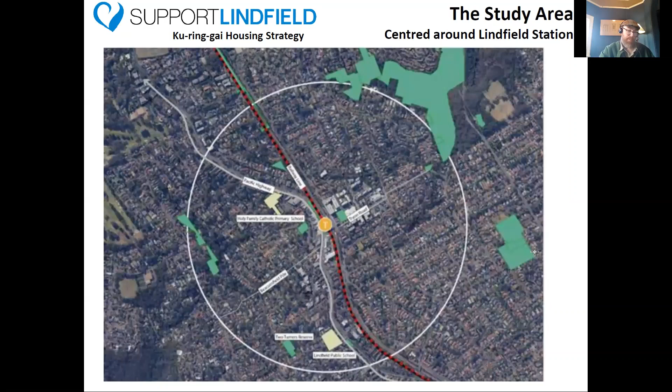Ku-ring-gai Council has created 3 options for Lindfield. The study area is an 800 metre radius from Lindfield Station, about a 10-minute walk. The logic being, people want to live near public transport, retail and community and amenity.

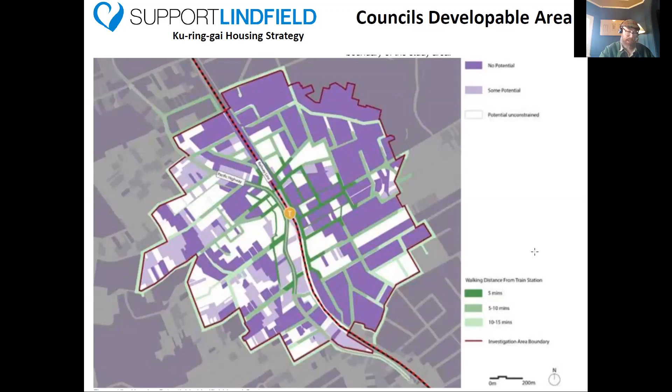The next part of the study has identified a radius that will determine what is the developable area. Within this, heritage, conservation, new strata apartments, bushfire, riparian areas, environment, critical vegetation have been excluded from this developable area. It's largely the areas that are left in white. These are the unconstrained or unrestrained detached houses, shops and older apartments that could be used for development to achieve the increased dwelling needs.

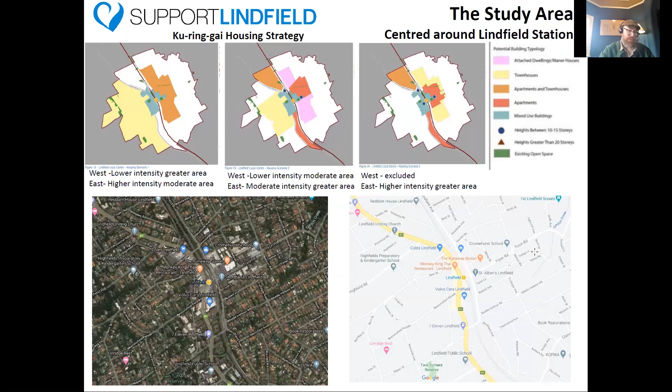The next part of the study considers what type and number of dwellings are required - townhouses, apartments and houses - and where these should be located. There are 3 scenarios under consideration that I will step you through.

Scenario 1: to orientate, the station is in the middle. You can see the east and west sides of the station and highway. Gordon and Chatswood directions are shown on the map. The Lindfield Village Hub is shown as the blue oval shape. The unconstrained land in yellow to the west is used for townhouses. Although 2 to 3 stories, these would be quite densely developed and would change the character of the area, which has remained largely untouched to date.

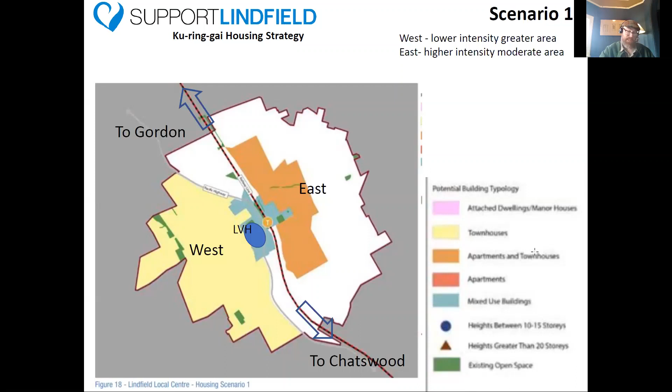The core or mixed use areas remain largely as is, but with an increased height to maybe 5 to 7 stories. The development footprint on the eastern side of the station is increased significantly to accommodate more apartments. I guess these will be 4 to 5 stories in a fairly heavily landscaped setting.

Scenario 2: the yellow land to the west is used for townhouses, but over a lesser footprint. A new area to the north towards Treatts Road is included and could be either apartments or townhouses. The small blue dots in the mixed use area are buildings of up to 15 stories. The apartment footprint on the east, shown in red, is expanded with an area shown in big pink, designated for manor houses, which is a new typology. These would be like grand homes that would be divided into smaller apartments.

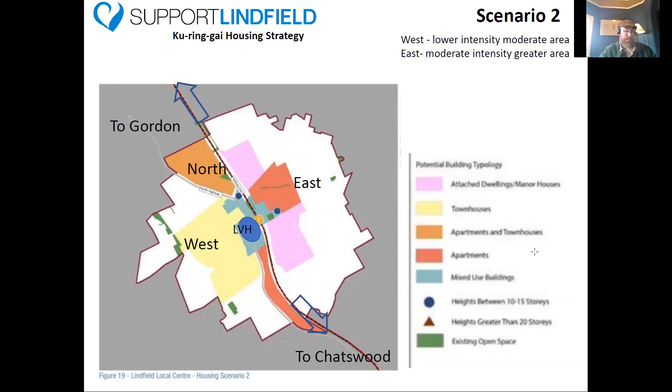Scenario 3: under this scenario, the increased density is along the highway, but the western area of the highway remains untouched as it is. The small blue dots represent buildings of up to 15 stories. On the east side, the manor house idea is dropped and the pink becomes yellow townhouses. Having looked at all 3 scenarios, it feels like we are forced to choose your poison, or the least worst option.

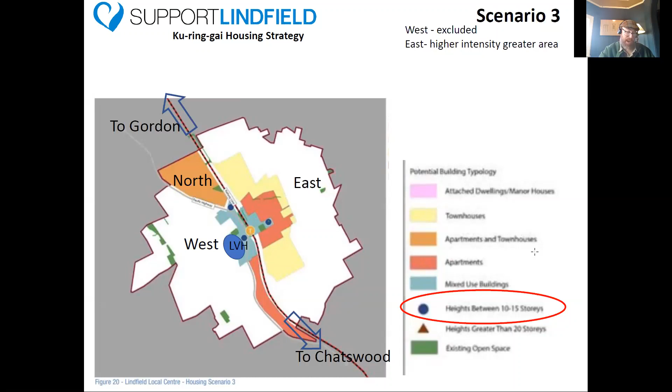At this point, Support Lindfield decided to step back and look at the problem through a different lens. We think there are alternative solutions that might provide a better outcome for all stakeholders.

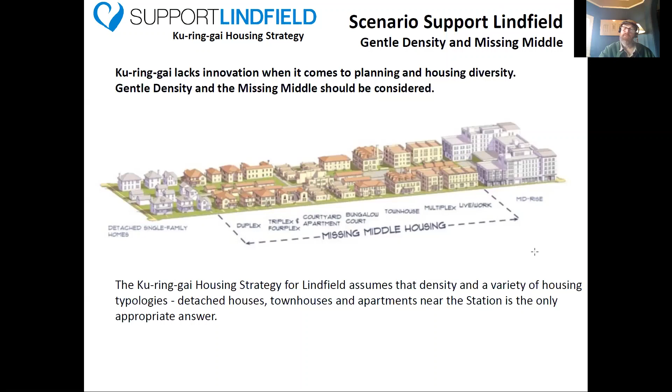Our starting point, the missing middle, a variety of housing typologies that people want to live in, nuanced beyond traditional planning. Gentle density is a global community-driven planning movement that supports increased population but in a way that doesn't destroy the character that existing communities find appealing. In our case, the garden suburb.

These neighbourhood centres have shops and good residential amenity that can accommodate low-scale forms like townhouses, villas, terraces, and manor houses with fairly minimal impact.

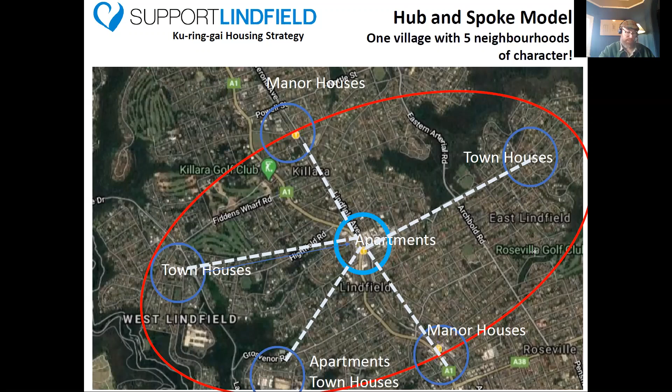The area around Lindfield Station can continue to accommodate 7-storey apartment buildings, as well as a mix of mixed-use buildings along the Pacific Highway. There is an opportunity to incorporate gentle density across the overall suburb, introducing well-designed additions that integrate with the existing housing character.

Underpinning the hub and spoke concept is the enhancement of existing bus services that already link Macquarie Park, Chatswood, Gordon, and of course, Lindfield stations.

Conceptually, it might look like this: the Lindfield Village Hub as the heart of our new village, as Support Lindfield has envisaged. Yes, we do need to get on with this project, and we do need the bridge to be put in place across the Pacific Highway.

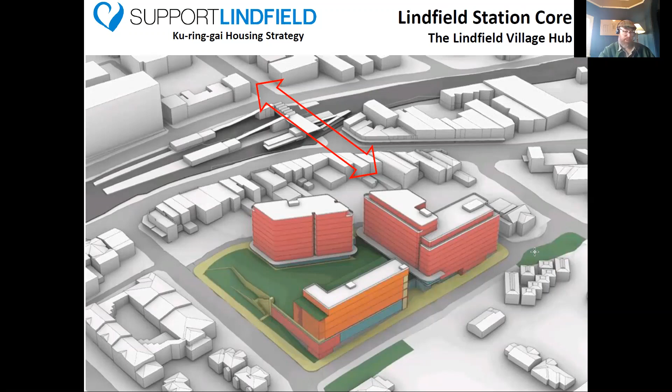Site amalgamations could create mixed-use precincts replacing the shops on the Pacific Highway. In this case, we think 7 storeys is sensible.

The fringe areas could contain apartments designed for owner-occupiers, local downsizers who don't want to live on the highway and want something that feels more like a home. We have a very good example of this, the Mirvac apartments on Tryon Road, which have been there for nearly 15 years.

From when the North Shore Line was built until about the 1930s, there were some great apartment buildings developed along the stations of Lindfield, Killara and Roseville. They resemble large manor houses and sit comfortably in the suburb.

While maintaining architectural integrity, the opportunity exists to convert larger existing houses to manor homes. Again, Ku-ring-gai has some good examples of these.

The East Lindfield shops represent an opportunity to enhance the village feel and, within a defined area, allow high quality townhouses, villas and terraces — a good example of the missing middle typologies that people want to live in. Similar thinking applies to West Lindfield shops.

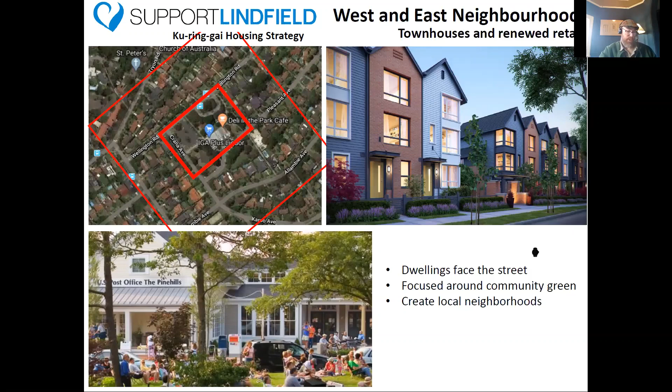The last concept goes to the heart of the gentle density idea, where small, well-designed dwellings can be added to existing housing in the form of granny flats, Fonzie flats over garages, and garden apartments.

For some, it would accommodate extended family. For others, a rental income in retirement that helps the younger in our community. If titled independently, they could be affordable homes for couples starting out and struggling with a deposit — think key workers, teachers, nurses who service our community but can't afford to live here.